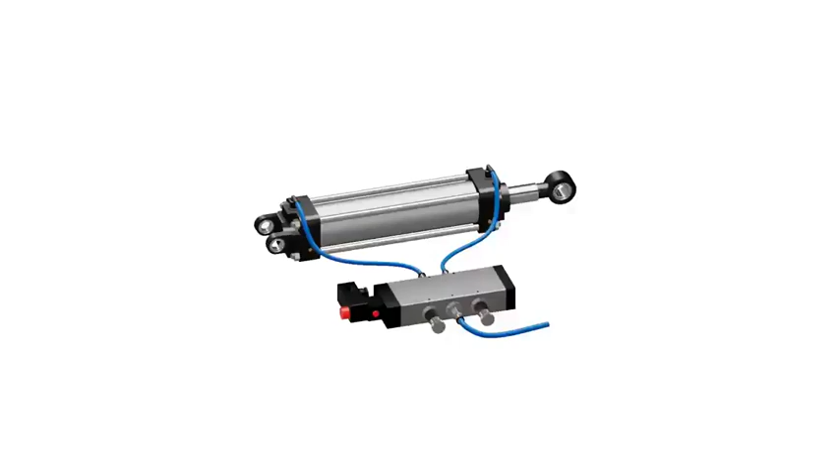Pneumatic cylinder is a linear actuator powered by compressed air to supply force on a load. The assembly shown here is the most common type of double-acting pneumatic actuator used in industries. It consists of a piston rod. This rod transfers force of compressed air to the load.

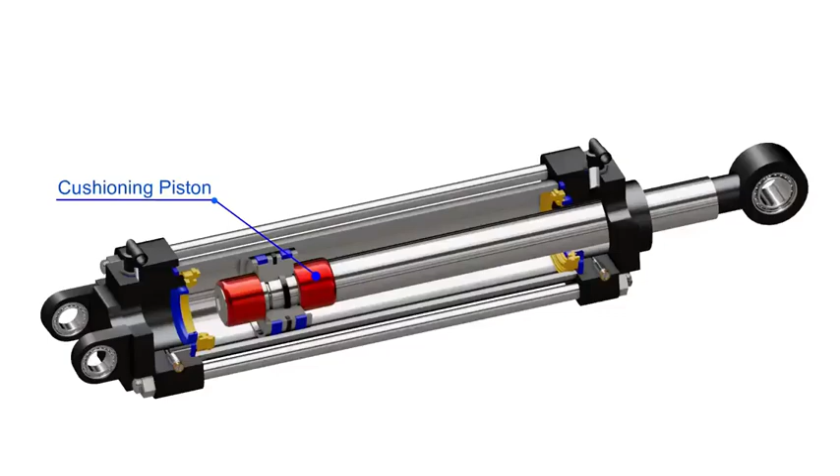Cushioning pistons are assembled with this rod. These pistons prevent any hard shocks at the end of the stroke by enabling the piston to stop slowly and gradually. The piston reciprocates back and forth when there is pressure difference between any of the two sides.

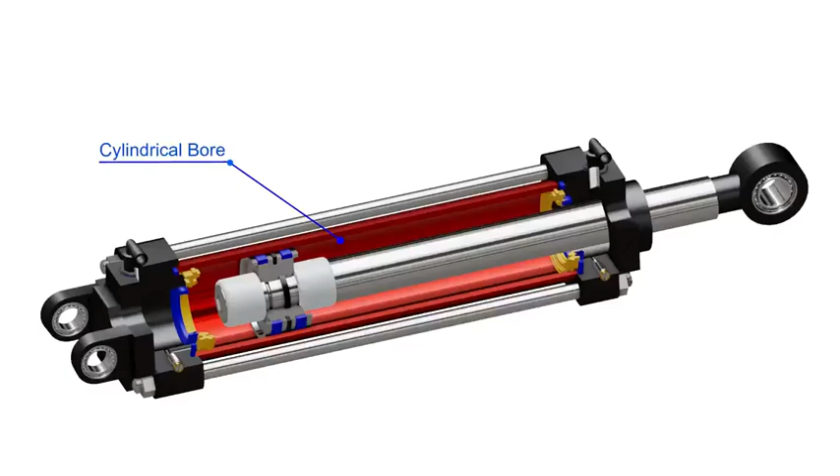A static seal ensures airtight sealing between the piston and rod. Piston guide rings are assembled to prevent metal-to-metal contact of piston and cylinder. Piston seal provides airtight sealing between the cylinder and piston. This whole assembly then goes into a cylindrical bore. This cylinder is generally made up of aluminium or steel.

A cylinder cap encloses cylinder chamber in one end and the cylinder head encloses a chamber from the other end. Cushioning buffers and seals are installed on respective ends. Captive adjustable cushioning screws are installed on each end. These screws enable user to adjust the optimum cushioning at the end of the stroke.

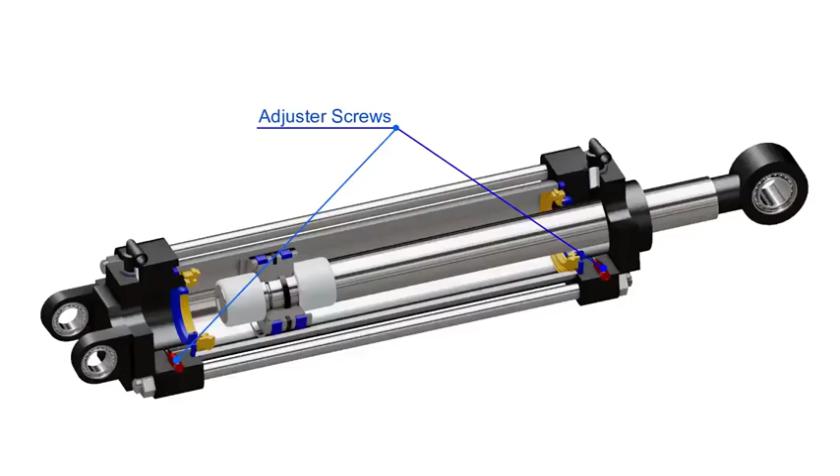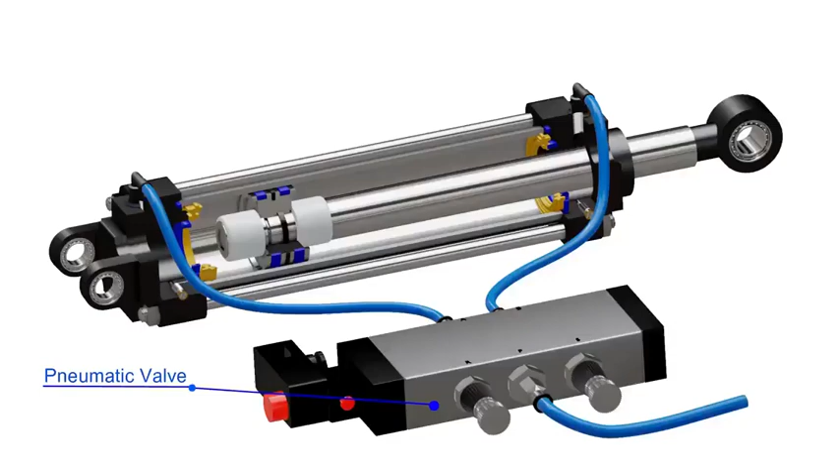This whole assembly is held together with tie rods. These rods also provide compressive and tensile strength to the actuator. Air ports are screwed to the ends through which compressed gas flows in and out. A pneumatic valve is connected to these air ports using pneumatic hoses.

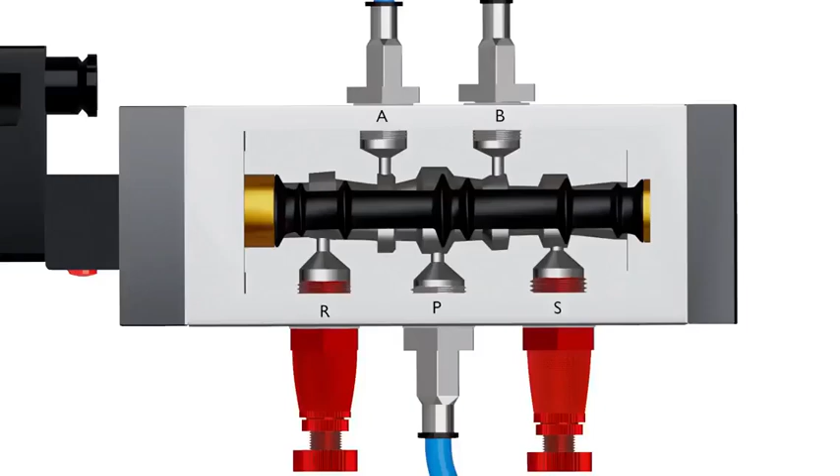The valve shown here is a 5-port 4-way valve. The ports A and B are connected to the cylinder. Port P is connected to the compressed air supply unit. Ports R and S are exhaust ports to which the pneumatic mufflers are attached. Now let's understand how a pneumatic cylinder works.

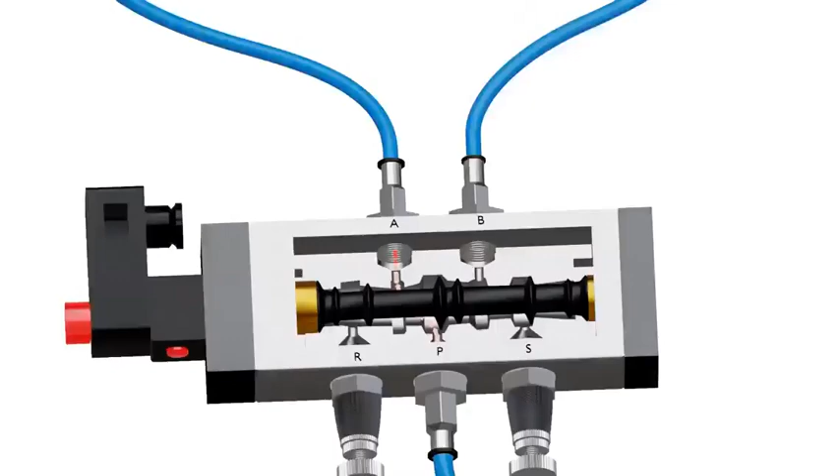The compressed air is supplied through inlet port P of the valve. The valve directs air to a particular direction, which we can observe in the animation. In this case, the air is directed to port A. This high pressure gas is then transferred to the cap end of cylinder through the pneumatic hose. This creates high pressure in the cap end of cylinder, which therefore pushes the piston towards the head end.

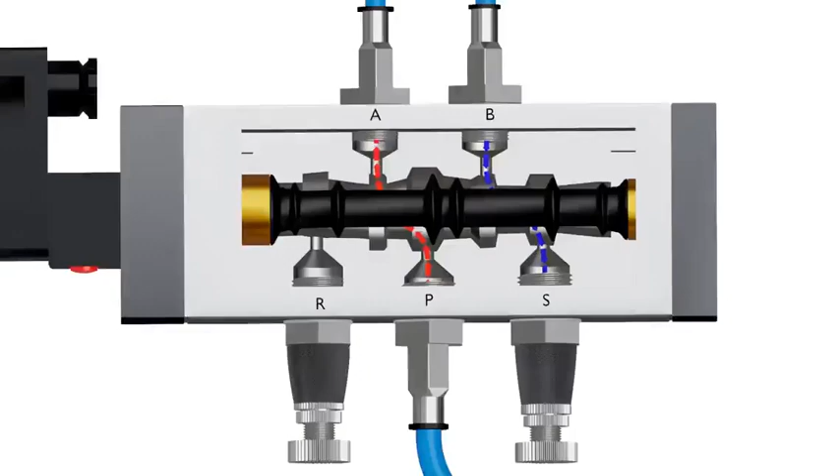This also pushes gas from the head end. This exhaust gas travels through the other hose and reaches the valve. The valve directs this gas towards port S and allows it to escape through a pneumatic muffler. The gas muffler helps to reduce any noise produced during exhaust. The process we just observed is the extension stroke of actuator.

During a retraction stroke, the valve directs compressed air to the head end of cylinder. This causes the piston to return and air on the other chamber escapes from the exhaust port R. The theoretical force of actuator is the relative pressure on the piston multiplied by effective area of piston on which pressure is exerted. Here the relative pressure is pressure of supplied air minus the atmospheric pressure.

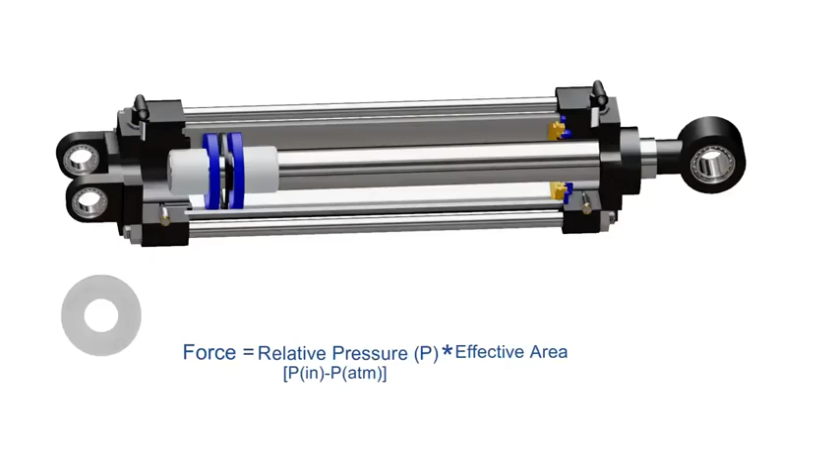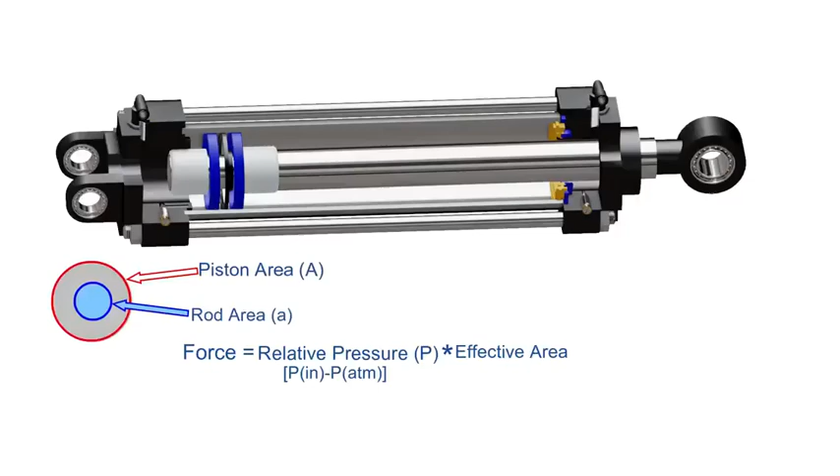During extension stroke, compressed air can exert pressure on total cross-sectional area of piston. This gives us the expression of theoretical force as relative pressure multiplied by total area of piston. During retraction, the effective area of piston is reduced because the air cannot exert pressure on the area of rod. This gives us the expression of theoretical force as relative pressure multiplied by partial area of piston.

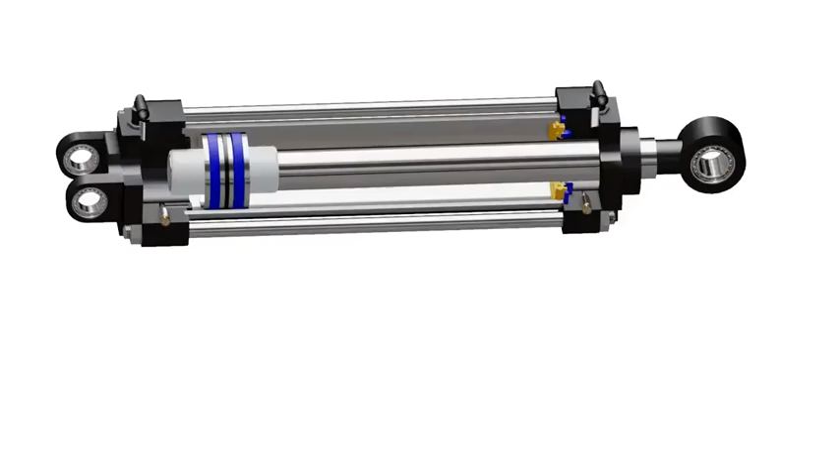Frictional losses on the interface of different surfaces also need to be considered while designing pneumatic cylinder. The diameter of rod and length of stroke are also determining factors for capacity of actuator.